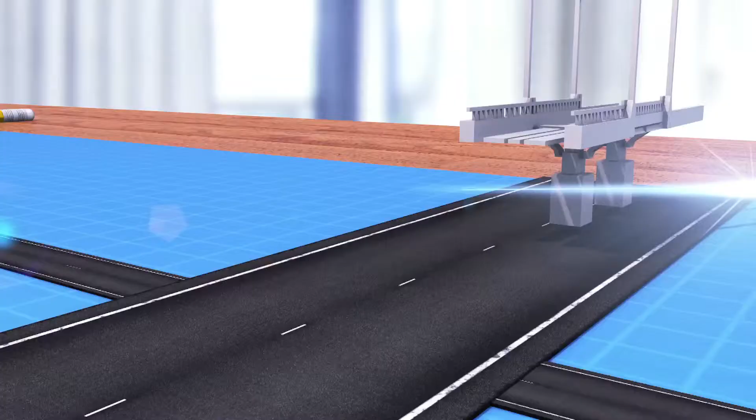From Mufassal alleys to the glittering highways, today's India is striving towards a better tomorrow. Today's India is in the making. The foundation and structure on which this rising India stands should not only be strong, but also pocket-friendly. It should be designed to meet the specific needs of the country.

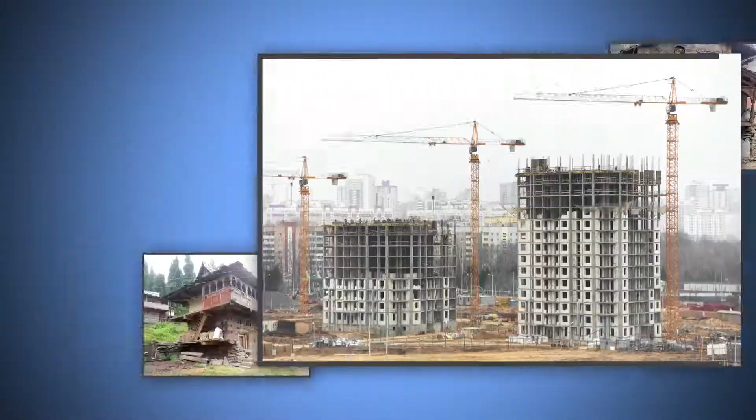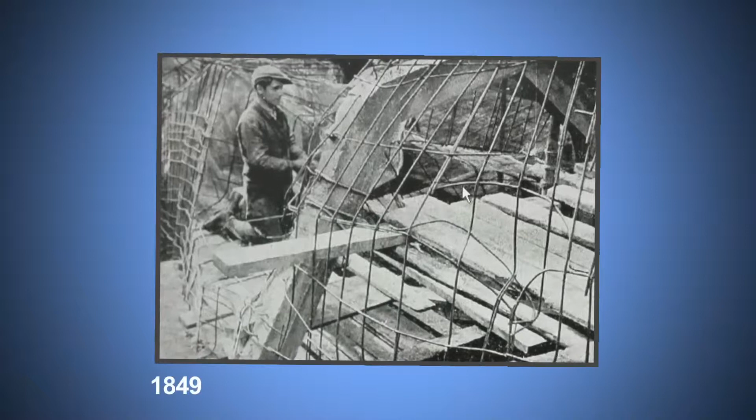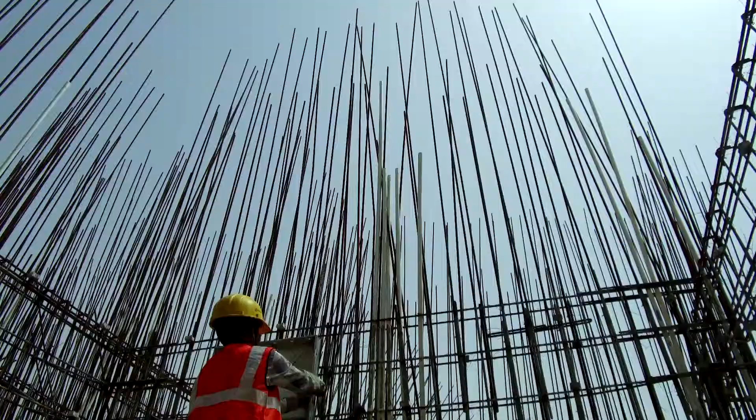Through history, there has been a constant evolution in the materials used for construction, from wood to stone to concrete. Though concrete in some form or the other has been used since the ancient times, reinforced concrete, as we know it today, was invented in the year 1849 by Joseph Monier. Since then, there was no looking back, and even today it is the building material of choice. However, this material comes with its drawbacks that need to be addressed.

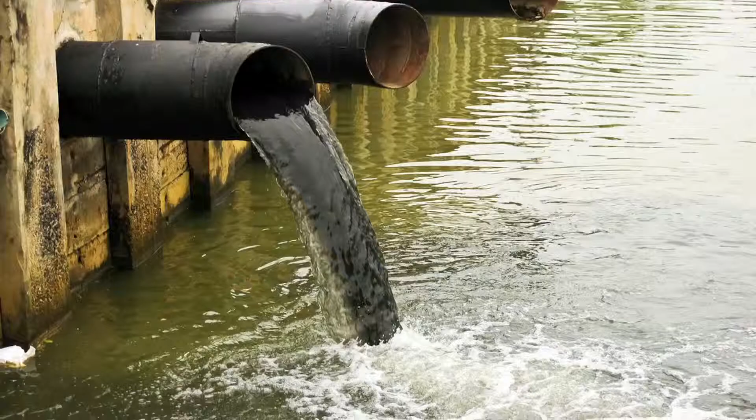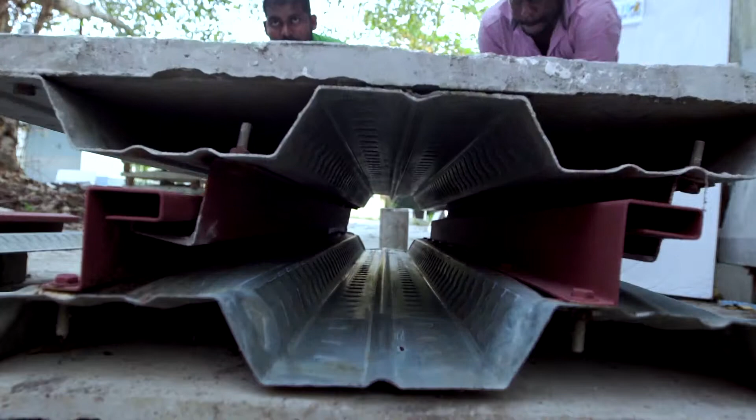Concrete is heavy, and construction using it takes time. It also has an adverse effect on the environment. It causes damage to the fertile topsoil, can lead to soil erosion, water pollution and flooding. This underscores the need to move beyond concrete and stone to develop alternative construction materials that are strong, lightweight and environment friendly. They should be able to withstand the ravages of natural disasters like earthquakes and cause minimum damage to life and property.

With its varied topography, culture and climates, there are many indigenous construction materials that address all these issues. Take for instance the state of Assam. In Assam, most homes are constructed using bamboo and mud. The walls are made of bamboo strips and then plastered with mud. The houses are detailed out to combat the heavy monsoons that lash across the state. The use of bamboo also has other advantages. It is abundantly available in the state, is affordable and is lightweight. It minimizes destruction in the event of an earthquake.

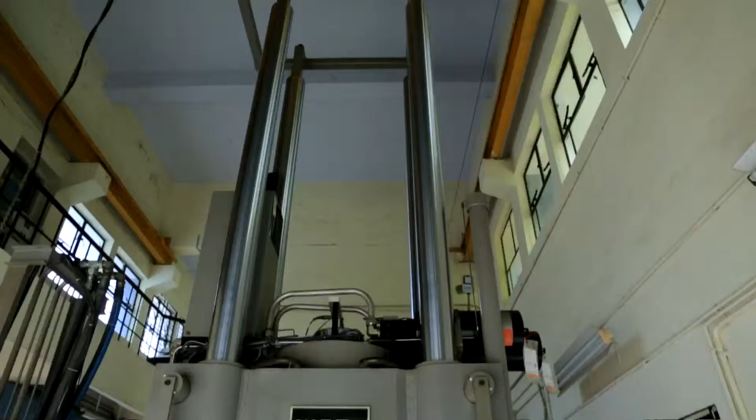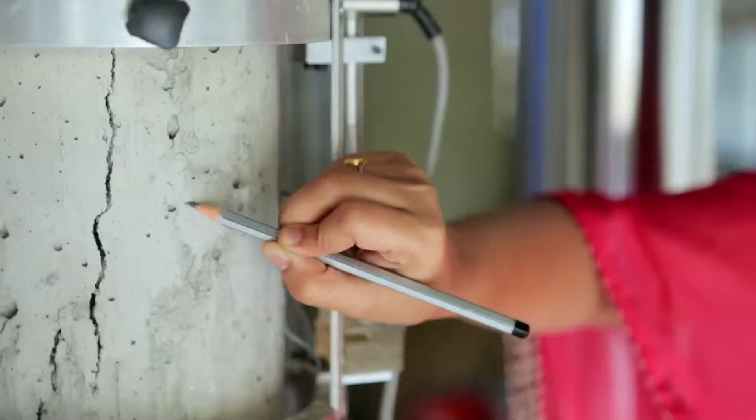Scientists in India are drawing upon the traditional knowledge systems to standardize them, strengthen them and make them accessible to all. They are taking inspiration from the architecture of Laurie Baker. As far back as in the 1960s, he was a pioneer in sustainable as well as organic architecture. Taking the lead in this initiative is the CSIR Structural Engineering Research Centre in Chennai. The scientists at CSIR SERC are designing, analyzing and testing structures to give shape to the country's landscapes.

We are committed to sharpen our focus on the high science-based futuristic technology development as well as to be in the forefront of serving society and industry through innovative solutions by fostering multidisciplinary approach to research in the thrust areas of structural health monitoring, disaster mitigation, advanced materials for sustainable structures and multifunctional structures.

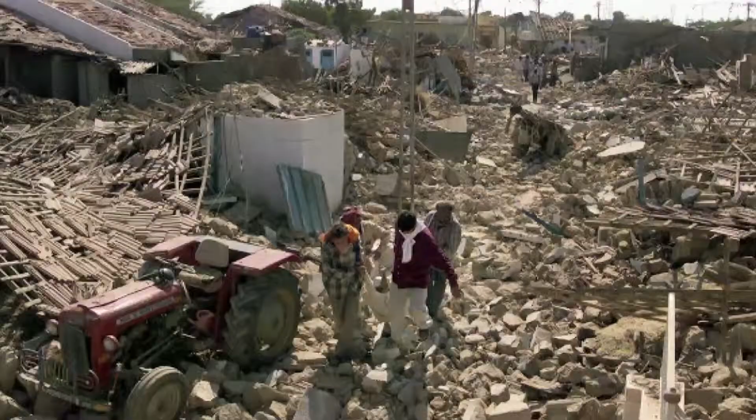For many in the country, affordable housing is still a dream. Expanding urban slums and people living on the streets remind us of another important mission in nation building: affordable housing for all. An increase in seismic activity across the globe has rendered millions homeless. To give life to the dream of owning a home and to mitigate the damage caused by natural calamities, scientists have developed a construction material that is lightweight, affordable and has the ability to withstand earthquakes. This wonder material is the precast lightweight wall and roof panels.

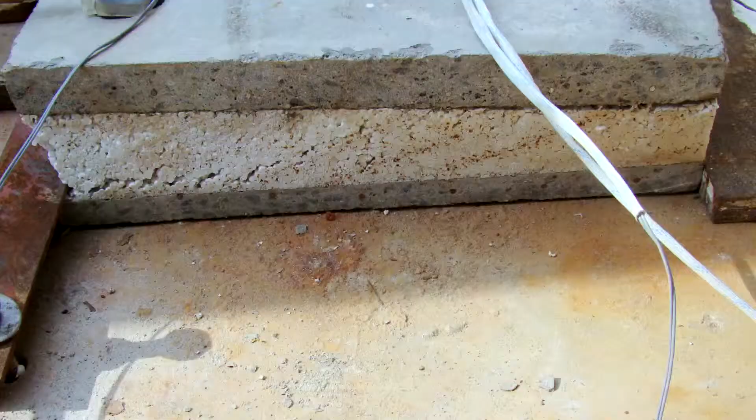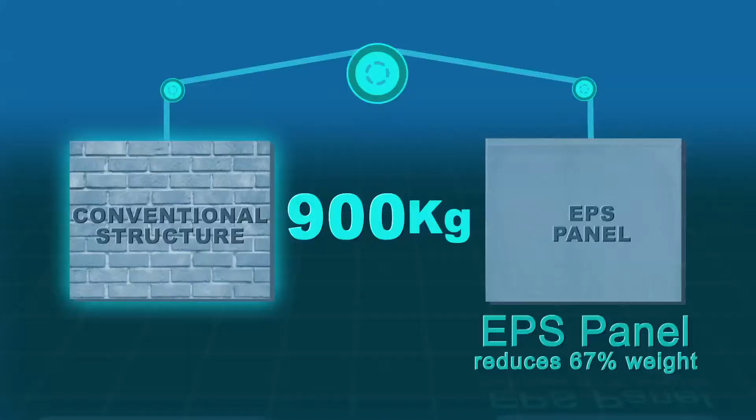These lightweight panels consist of two reinforced concrete skins with expanded polystyrene or EPS as a core material. This EPS is reinforced with a wire mesh in 3D directions. The wire mesh prevents polystyrene core shifting and greatly increases the panel strength. Nearly 2/3 of the panel thickness is replaced by EPS. This reduces about 67% of weight of the structure without compromising its structural integrity. The use of self-compacting concrete for outer skin makes for faster casting and greater quality control.

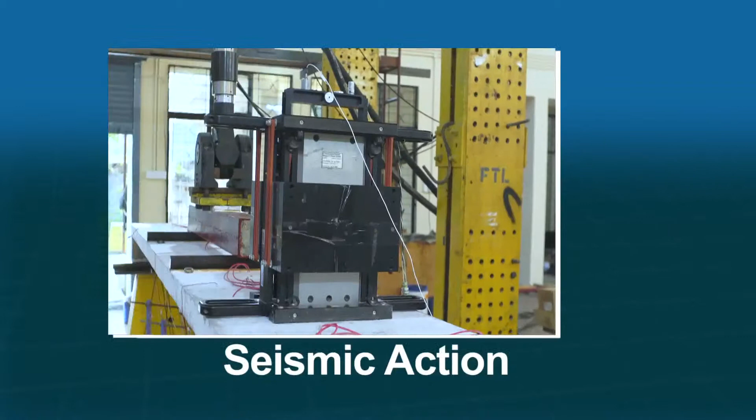The performance of these panels is evaluated for flexural, axial and seismic actions. They have undergone a series of stringent tests to ensure their durability as well as test their ability to withstand seismic activity.

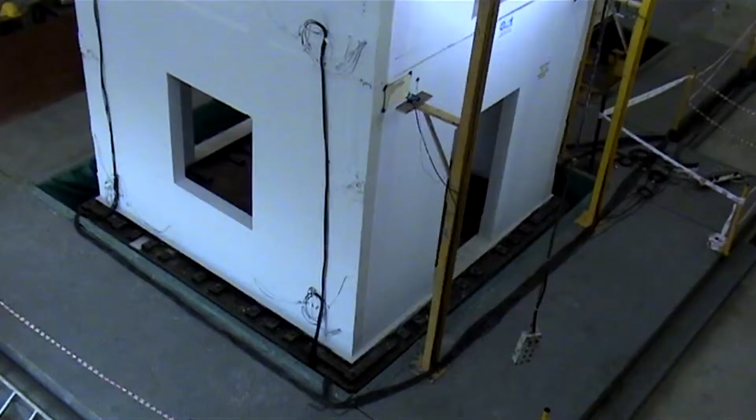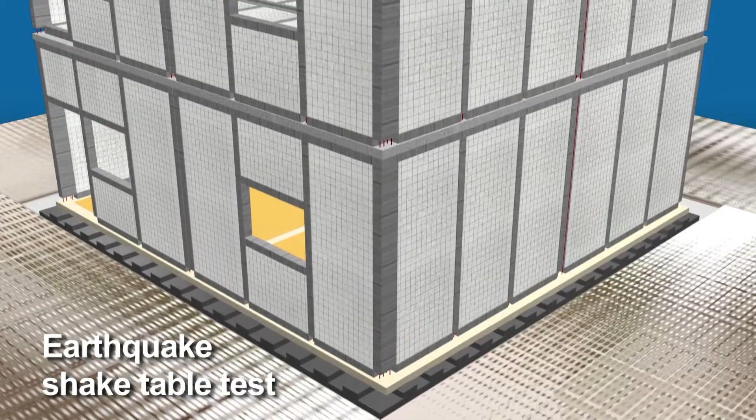We have further gone for developing into bigger size of room size, that is 3 meter by 3 meter, and this panel has been assembled over the shake table, and that has been studied for seismic force. We have gone with the 0.5 G forces, and we could see only the superficial cracks only at the openings. Otherwise the building is strong enough to withstand the earthquake forces.

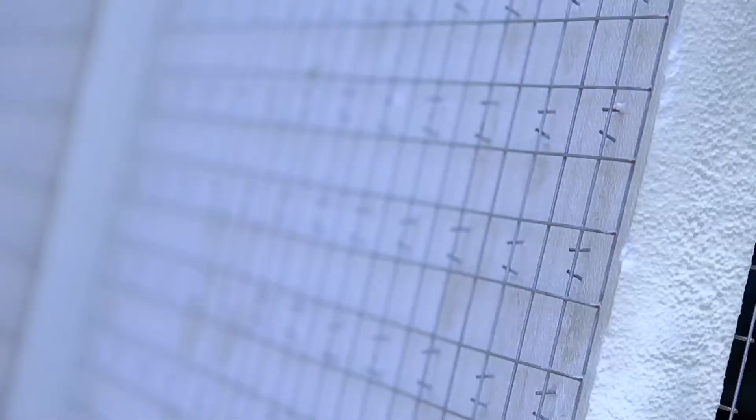The EPS panels have a host of advantages that make them the ideal construction solution. They not only make walls and roofs stronger, but also help build them faster.

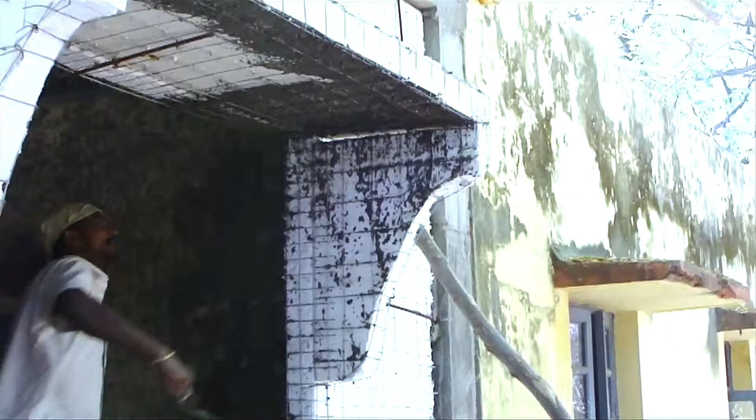They will help the government meet the demands of housing through quick and quality constructions. These houses, nestled in the mountains at Dharmashala in Himachal Pradesh, are a testimony to this. Having low thermal conductivity, they can remain cool in summers and warm in winters. The panels are resistant to corrosion and can sustain in all kinds of atmospheric conditions. This makes them especially suited for India, a country whose climate is as diverse as its culture.

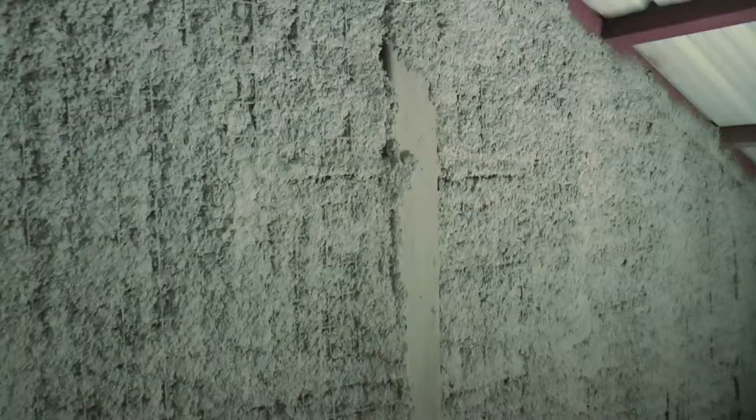The advantages of the EPS panels also extend to the environment. They lead to pollution-free construction, and the wastage of materials is minimized as compared to construction using conventional methods. The panels also use industrial waste in huge quantities. This results in sustainability of construction material.

An offshoot of the lightweight EPS panels are the two-pit toilets. With the launch of the Swachh Bharat Abhiyan, there has been a sustained drive to make an open defecation-free India. Even in this day and age, people are bereft of toilets, especially in rural areas. This affects their dignity and leaves them vulnerable to disease.

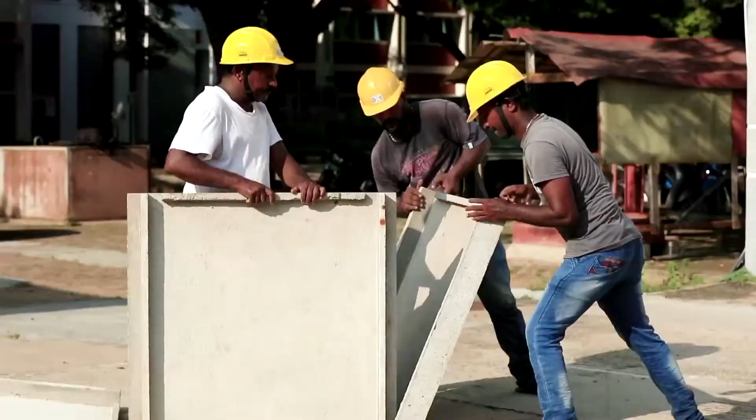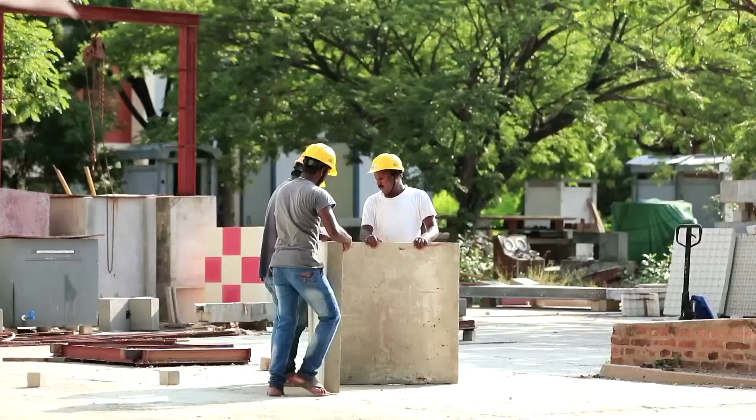The need of the hour is affordable toilets that do not take up too much space and are easy to install. To address this need, scientists have developed the special toilet unit using thin precast concrete segmental panels. These panels can be joined one above the other with perfect bonding and through connecting rods. The septic tank can also be built using these thin precast panels.

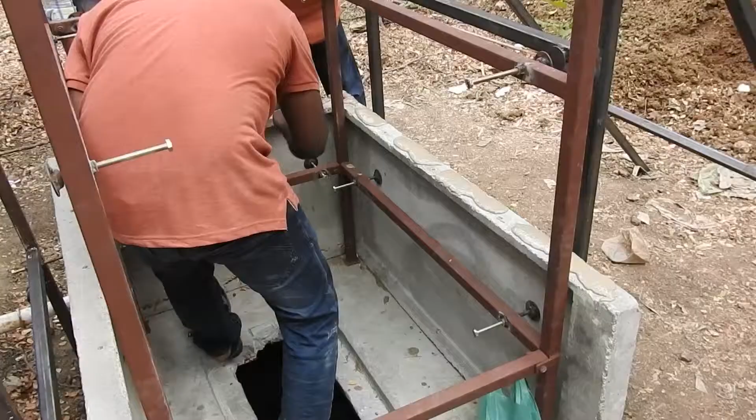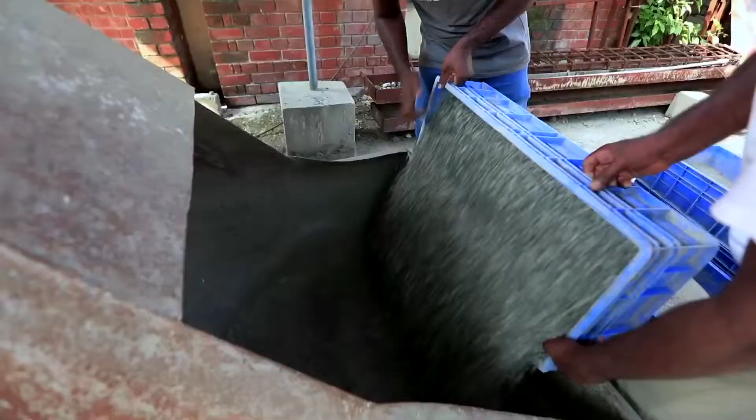One unit can be made ready to use in just 3 hours' time without using any special equipment. They have been designed for durability and can withstand any climatic condition. The two-pit toilets present many advantages. The construction uses industrial waste, and so it is eco-friendly. The panels are cost-effective, lightweight and durable, making them easy to transport.

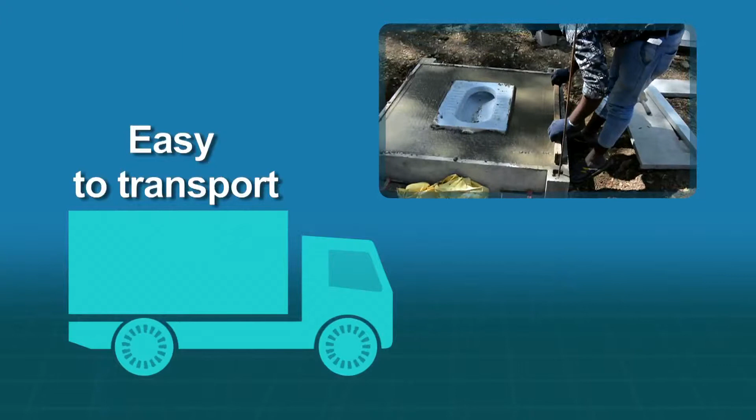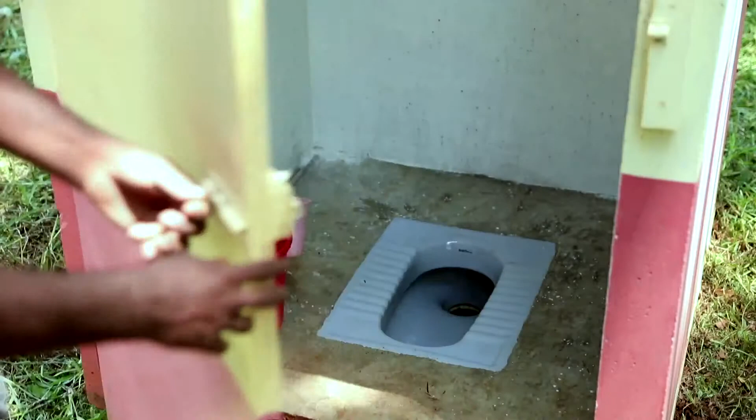This means the all-weather toilets can be easily installed even in far-flung areas. And most importantly, one unit costs only 12,000 rupees, making it eminently affordable. Open defecation-free India is now not just a vision, but also a reality that is taking shape.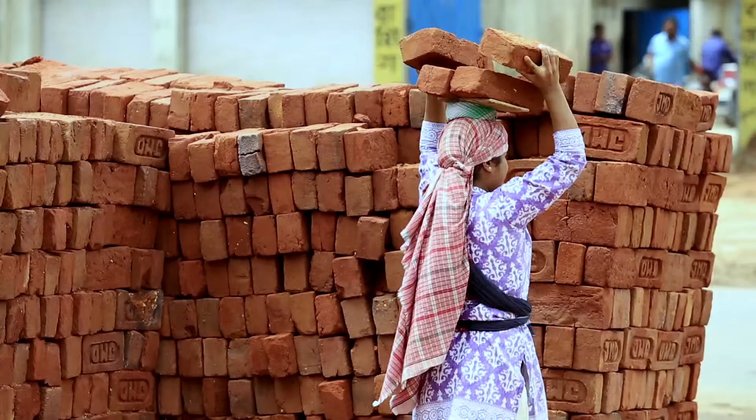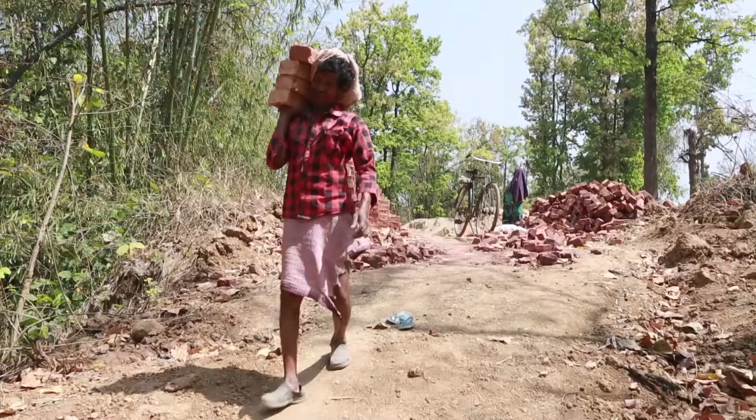Bricks, stone, mortar. Till today, they have been the backbone of all construction, but they have an adverse impact on the environment. That has been a concern to scientists worldwide. Use of brick results in greater CO2 emissions, right from their manufacturing to their transportation. The need today is for a sustainable construction material that mitigates the negative impact of construction on the environment.

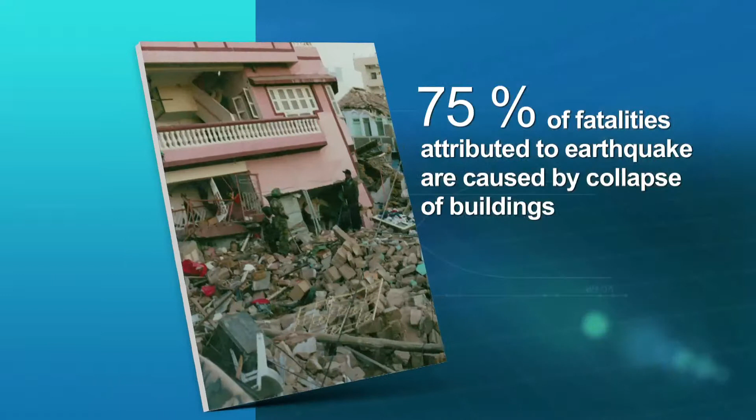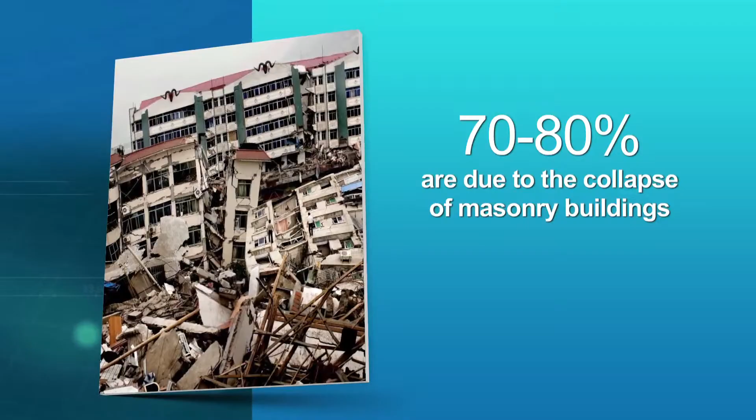Another drawback of masonry structures is their vulnerability to earthquakes. 75% of fatalities attributed to earthquakes are caused by collapse of buildings. Out of these, about 70 to 80% are due to the collapse of masonry buildings. There is a staggering demand for strengthening methods to improve the structural performance of masonry structures to resist the seismic loads.

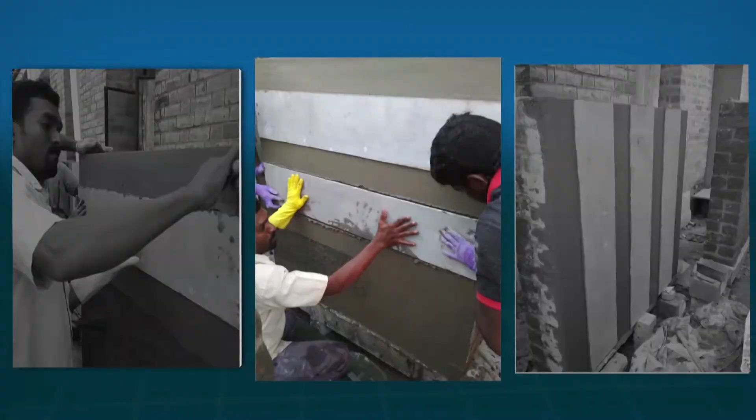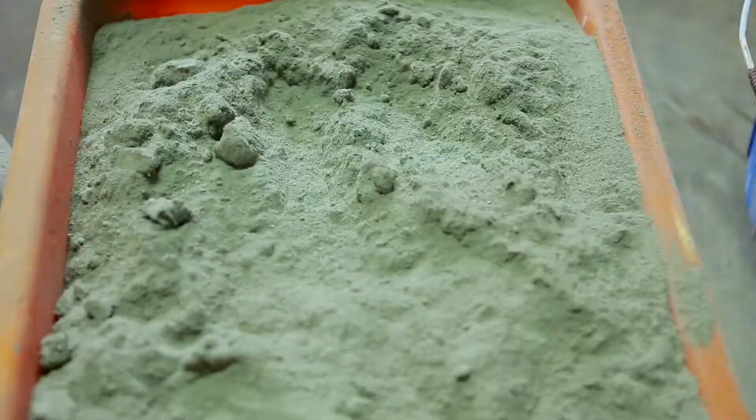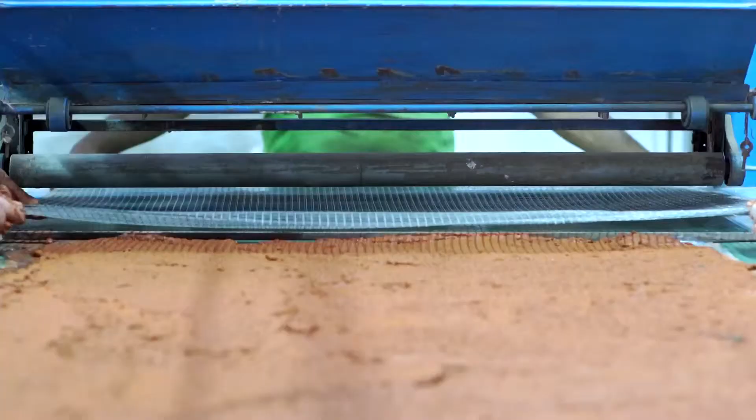To address these issues, scientists have developed a building material lighter than concrete, yet just as strong, if not stronger. They have developed the innovative textile reinforced concrete, or TRC, that is set to revolutionize the construction industry. It is a composite building material with textile or fabric embedded in a cementitious binding matrix. It has undergone a series of stringent tests to emerge as a strong, durable alternative construction material of the future.

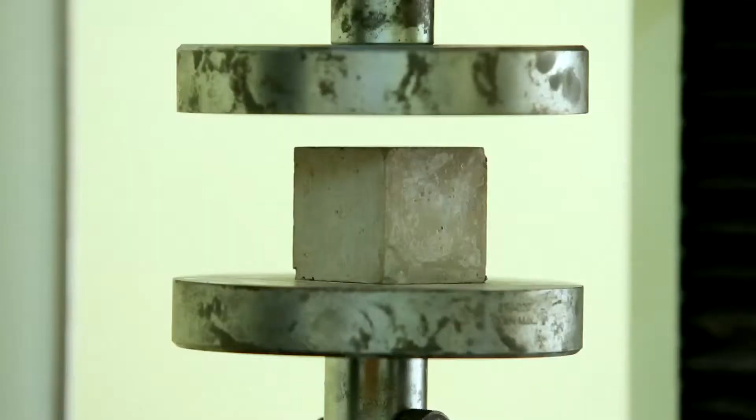Compressive strength of textile reinforced concrete mainly depends upon the compressive strength of the binder. So we have to determine what is the maximum compressive load the binder can take. So we are doing compression tests by testing the cubes.

We have used a material testing system which is software controlled to determine the compressive strength of the binder, and that is taken as the design parameter in the design of textile reinforced concrete components.

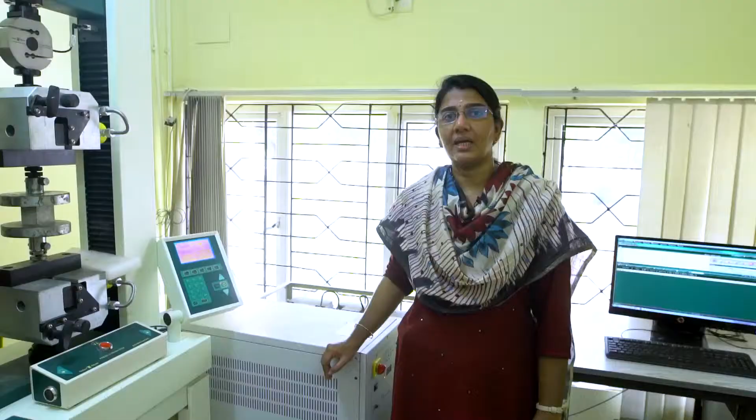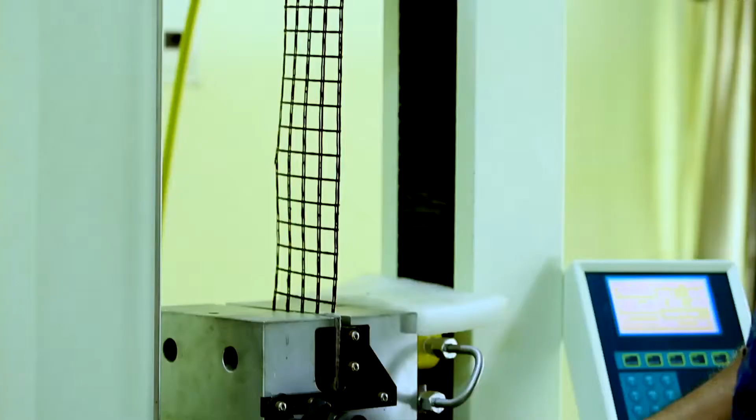This is one of the typical glass textiles we used for textile reinforced concrete developments. This is polyacrylic coated, and we have to determine the maximum tensile strength, maximum elongation ability and the failure pattern of this textile.

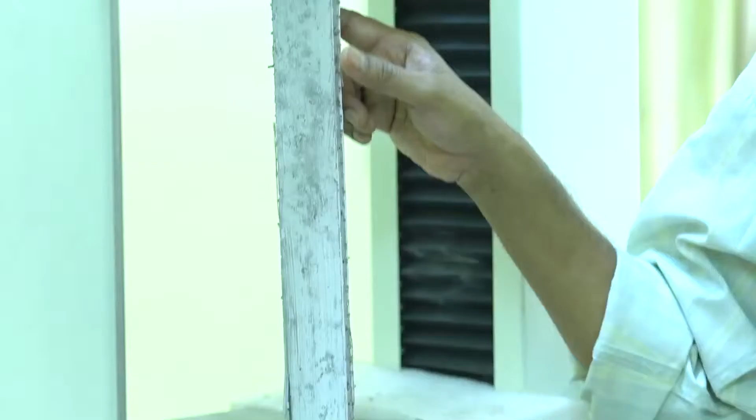This test is a uniaxial test on a TRC specimen. It is subjected to uniaxial tension. When there is uniaxial tension, the stress state is uniform throughout the specimen. When it is loaded in the uniaxial direction, multiple cracks will occur due to the layers, and these multiple cracks are very advantageous for the structure. Multiple cracks mean energy absorption and ductility of the member, and this will be very useful for earthquake regions where the expected energy absorption is very high.

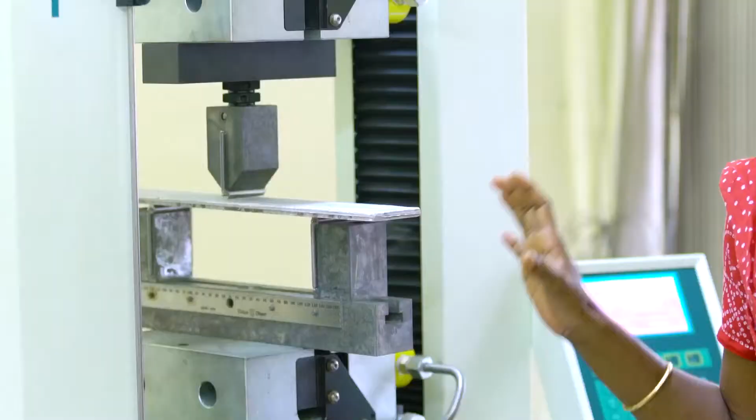This is the test setup for flexural strength testing. Like uniaxial testing, flexural strength testing also gives the tensile property of textile reinforced concrete, but indirectly. It actually evaluates the ability of this textile reinforced concrete to withstand failure in bending.

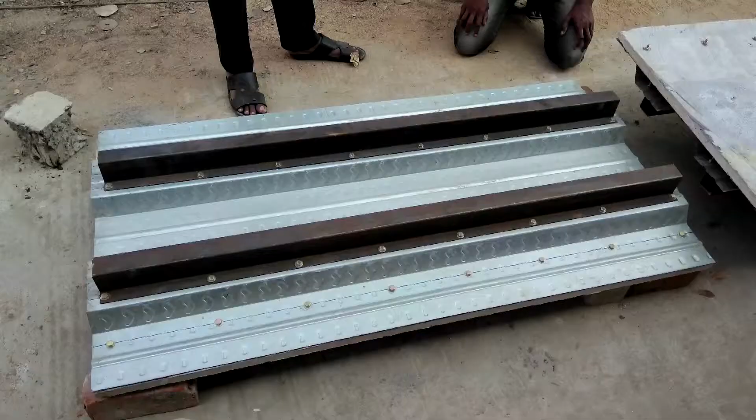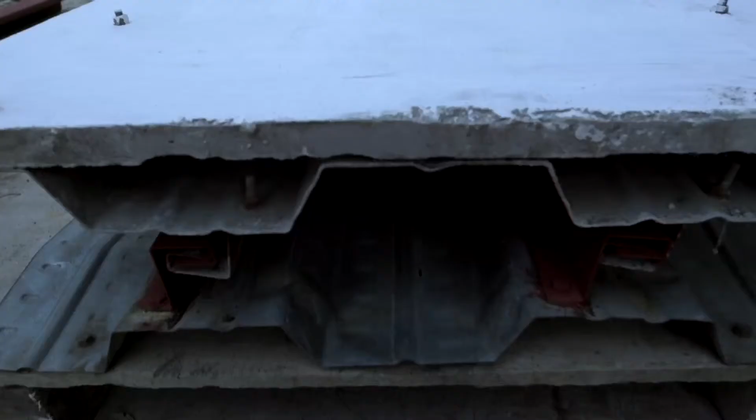TRC has proved itself to be versatile and has been used in a number of interventions. TRC panels can be used for a number of exterior and interior applications. The technology I am going to explain is a TRC wall panel system, which consists of a TRC skin and a profile sheet. The two systems make up one single wall panel system and are connected by a spacer system, which slides one over the other.

The idea is to join the two panel systems by this spacer so that a gap is formed in the center of the wall. This gap can be used for damp proofing. It can also act as insulation against extreme weather and as an acoustic barrier. The central portion can also be used for services such as fire lines, water lines and fire hydrants.

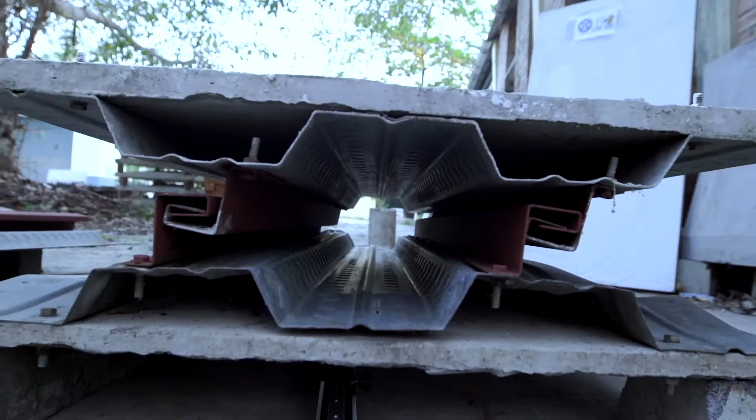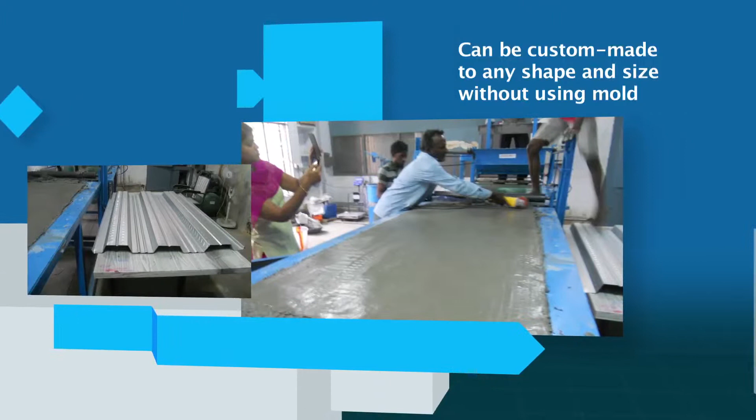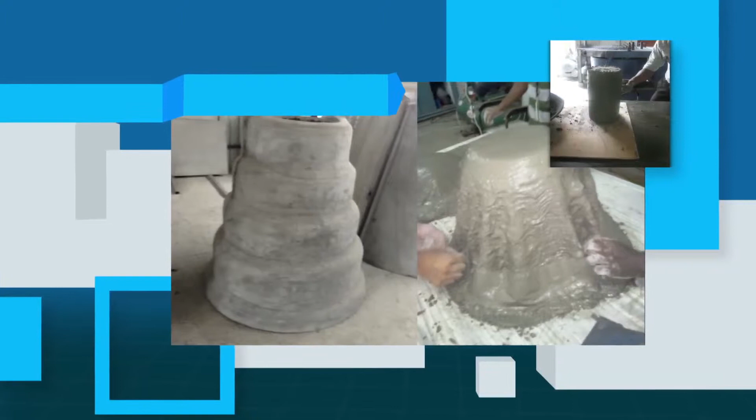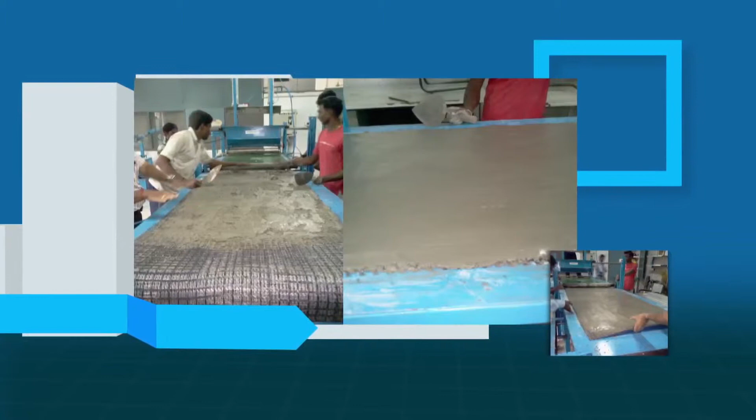TRC panel structures are not just useful, they can also be aesthetically pleasing. Among their many advantages, one is that they can be custom made to any shape and size without using molds. The TRC material can be used not only for buildings, but also in street furniture, manholes, flower pots, etc. The panels do not require heavy machinery for mass production. Not only are they cheaper, they also take less time to manufacture. Even unskilled laborers can manufacture them.

India has applied for a global patent for this technology. Producing TRC panels at large scale has the potential to revolutionize the way we look at our infrastructure. For rural and urban developments, we have developed load-bearing as well as non-load-bearing panels that can be used for wall construction, roof construction, boundary walls, temporary shelters, security cabins, and so on. It has vast potential for application in various segments.

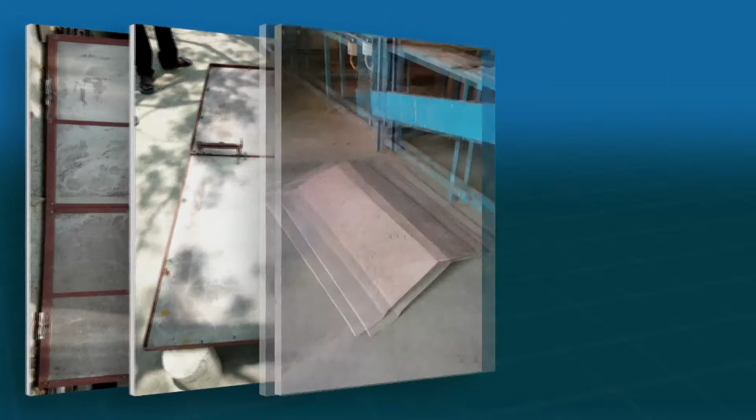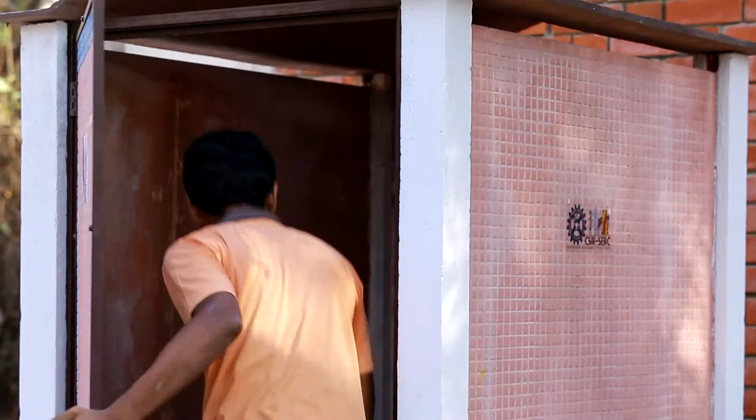This material has all the potential to be considered as a candidate for building New India. TRC panels have established their mark at the global level as an alternate construction material. Now, they have the potential to help shape India's landscape. Scientists have developed toilets using TRC panels and are contributing further to achieving the vision of an open defecation-free India.

The TRC toilets have many advantages. They are lightweight, non-corrosive and durable. The TRC toilets are also more affordable than conventional toilets. A toilet can be assembled in just 3 to 4 hours by 2 persons using simple tools. The lifespan of these toilets is 25 to 30 years.

Innovations in textile reinforced concrete also have the potential to save lives. This is manifested in the TRC crash barriers being developed at CSIR-SERC. These crash barriers can at times be the difference between life and death in road accidents.

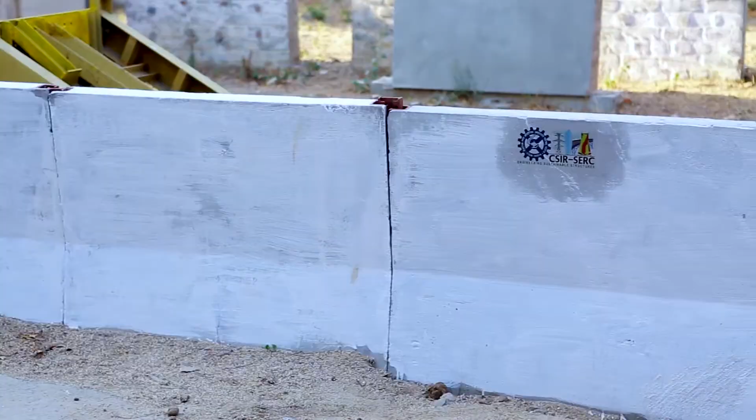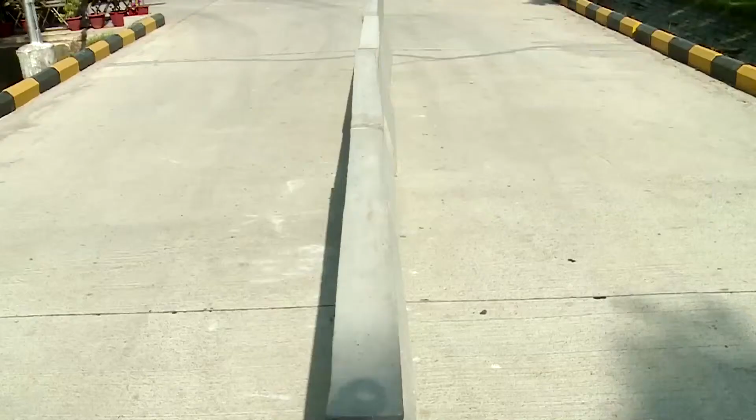They are capable of resisting impact forces, easy to install, replace or repair, elastically deformable and so cause less damage to vehicles and passengers, have better performance than conventional barriers, and are adaptable for use in narrower spaces.

When a vehicle impacts this crash barrier system, the force is dispersed to the adjacent crash barriers by this side anchorage mechanism.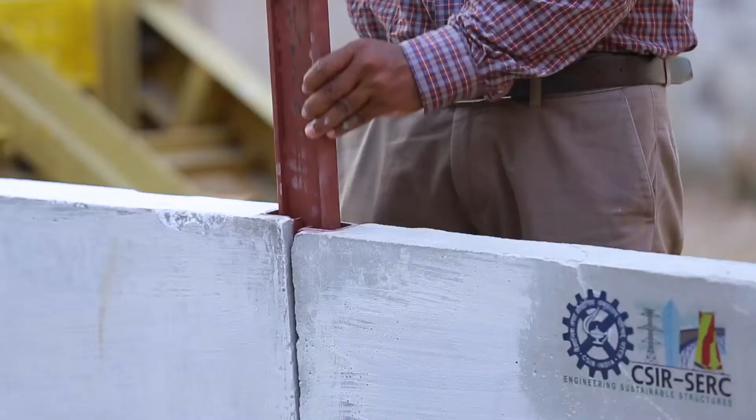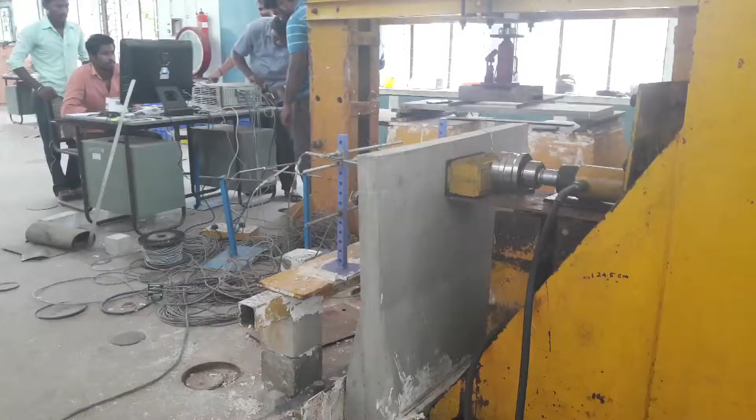Simultaneously, the force gets dispersed to the ground using the base anchorage mechanism. The impact of the TRC crash barrier systems can be felt on many levels. For the road and transport sector, they are a new product that has mass application both nationally and internationally. For the road users, they contribute towards improving quality of life by making roads safer.

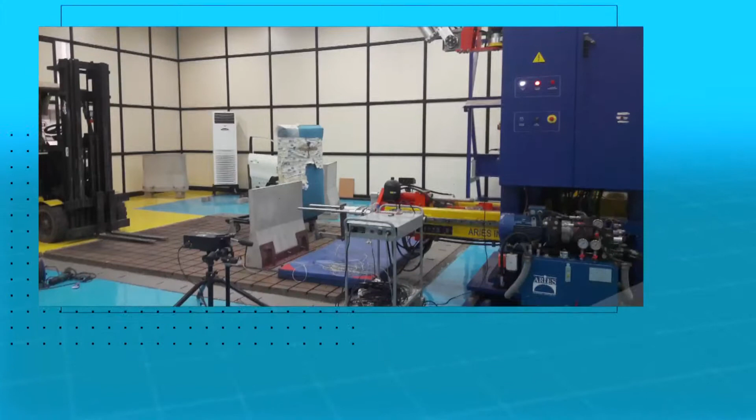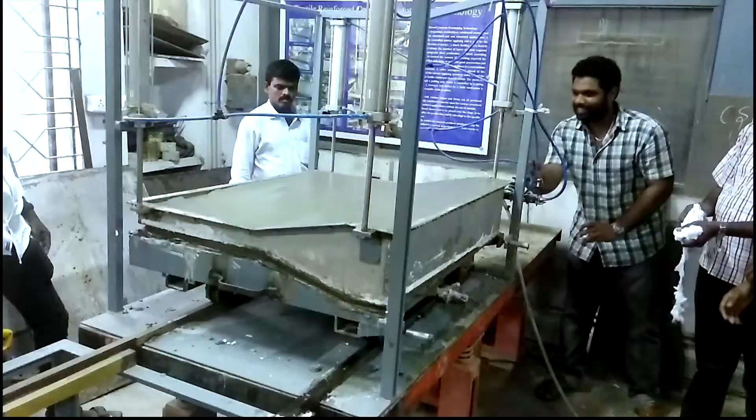They minimize damages to vehicles and severity of injuries. They even have a positive environmental impact. They have no harmful substances, are cost-efficient, and there is an absence of corrosion. These crash barrier systems align with the government's Make in India initiative by opening up new avenues for large-scale application of technical textiles. There are 3 types of barrier, for example, as per the classifications of Indian Roads Congress.

They are called low containment, normal containment and high containment. Low containment is the one which has been used at many places, and high containment is the one which is used at hazardous places or in extremely difficult situations. Our design is for low containment, and it can be easily extended for other categories of high or normal containment.

Construction touches every aspect of life, and so do the new construction materials that are being developed. One such aspect is electricity. Even as the government is expanding the reach of electricity, the question of unhindered power supply remains. The tower in our village fell, so there was no electricity for 4 weeks. My children had to study in candlelight. Like this village, there are many others that suffer due to long power cuts.

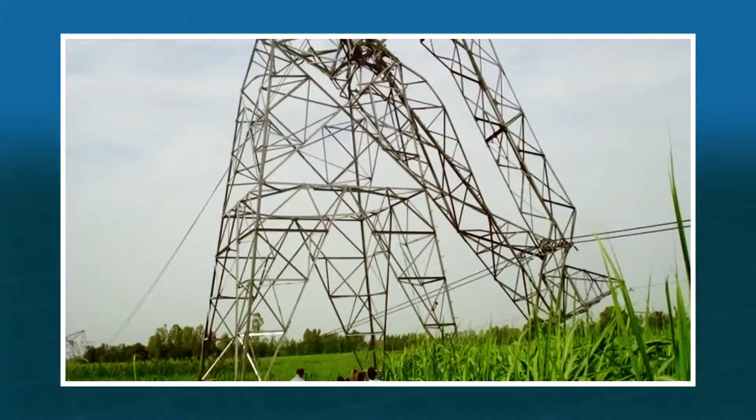In a country as vast and geographically diverse as India, ensuring uninterrupted power supply is no mean task. There are times when natural disasters cause collapse of transmission line or TL towers. This interrupts the power transmission. If these collapses are not attended to well within the time, it leads to huge monetary losses as well as loss of service to the customers. Statistics tell the story of losses incurred by the nation owing to inefficient power supply.

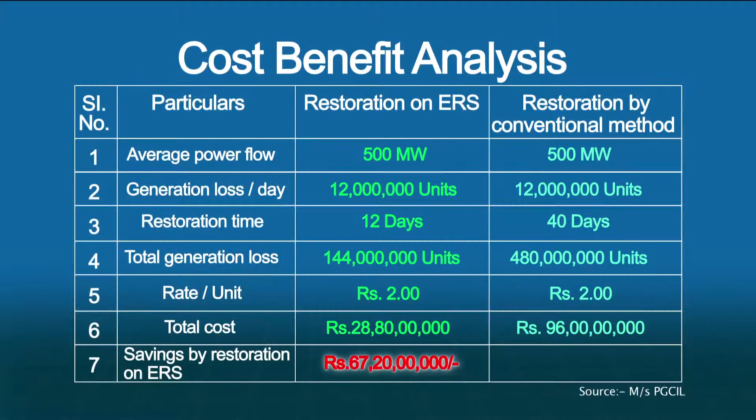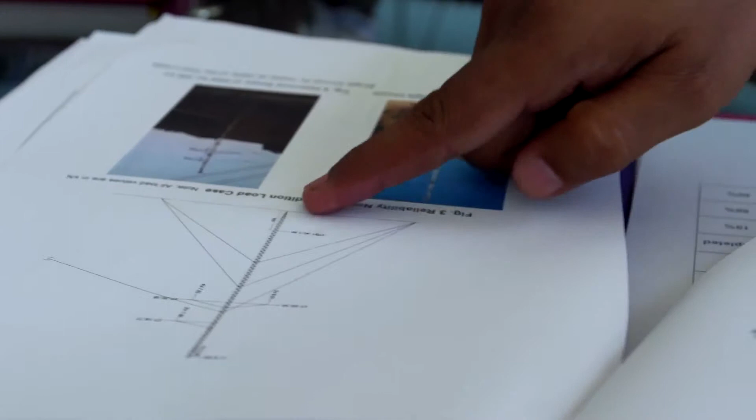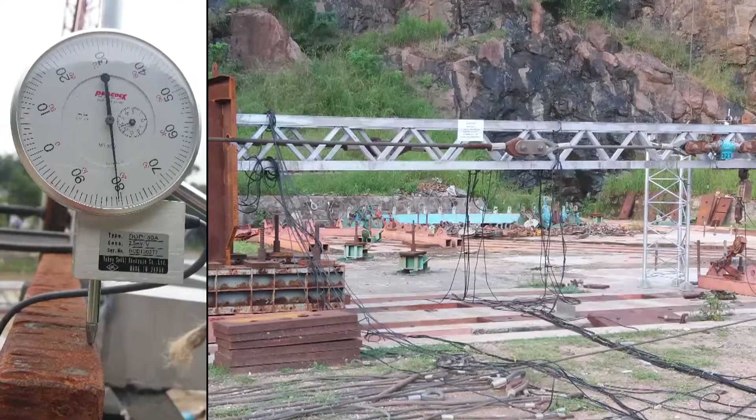Conventional methods of power restoration take as many as 3 to 4 weeks. To address these problems, the CSIR-SERC scientists have developed a simple yet effective solution. The Affordable and Convenient Emergency Restoration System, or ERS technology, can reduce the time for resumption of power supply after a transmission line is damaged. The developed system has been designed using FE software and has been proof tested for the prototypes of the structures. All the elements have been tested as per international standards, ensuring that the system is structurally stable.

By using this system, there are ready-made modular structures available which we have to transport to the site, and within 2 to 3 days we can restore the power. The system is easy to plan and use. Though this system is compact, yet it is affordable. We have used lightweight material for the fabrication of this system so that it helps us to use it at remote locations.

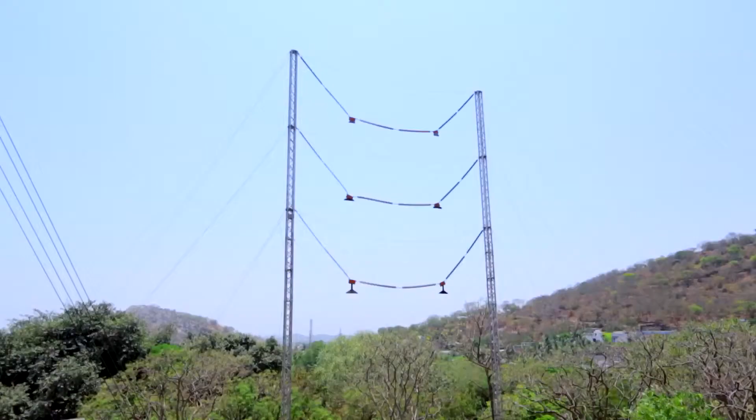Third thing is, this system is so flexible that we can develop any configuration of transmission lines, whether it is single circuit, double circuit towers, or the lines from 33 kV to 800 kV transmission lines. We can develop any transmission line tower by using this modular system. ERS is a lightweight, temporary structure that can hold the transmission line in place of damaged poles. It is easy to use and its light weight makes it possible to be carried to all kinds of locations. It can easily be installed in all soil types and assembled in a short span of time.

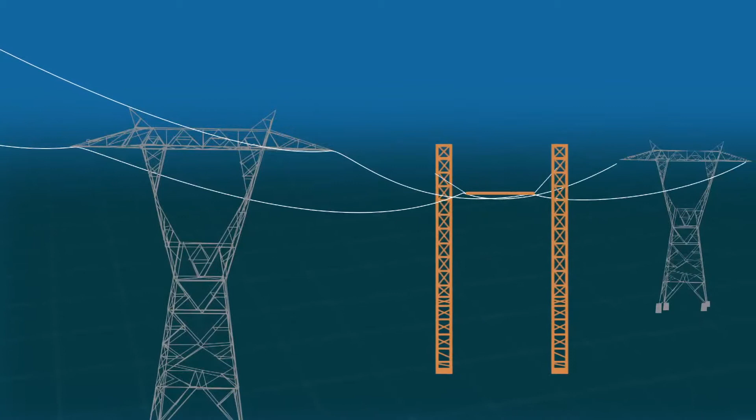The state electricity boards as well as distribution companies can cut their losses while consumers get their right of uninterrupted supply. The ERS makes every stakeholder a winner. Shorter durations of outage means people will have to use lesser fossil fuels, thus saving the environment. The ERS technology has the potential of hope of a new prosperity for people from the Himalayas to Kanyakumari.

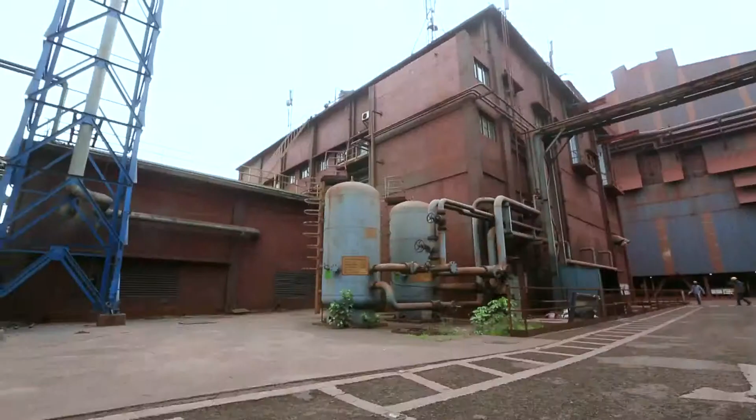If industries and dams are modern temples, then scientists toiling at labs like CSIR-SERC are no less than seekers. They seek welfare for all, and such path-breaking technologies are the fruits of their labor. They have but one mantra: science as the building blocks of development.